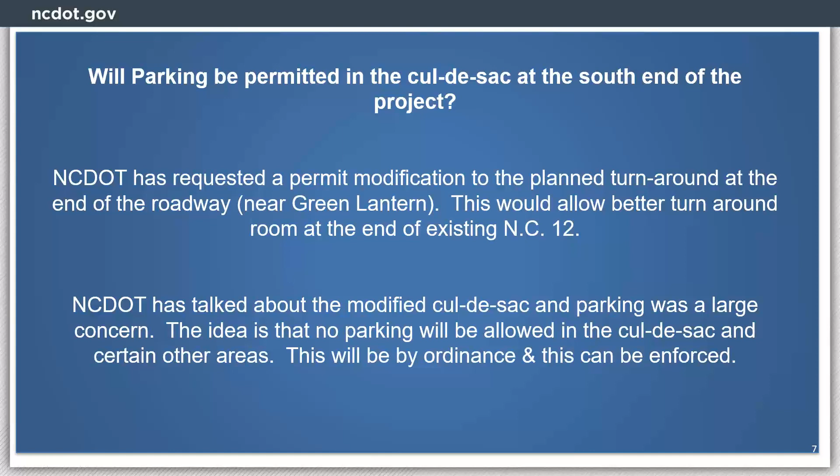Currently NCDOT is not aware of a name having been selected for the bridge. That is a question that has come up quite often, and I've been monitoring the bridge naming committee's agendas, and I have not seen it show up yet.

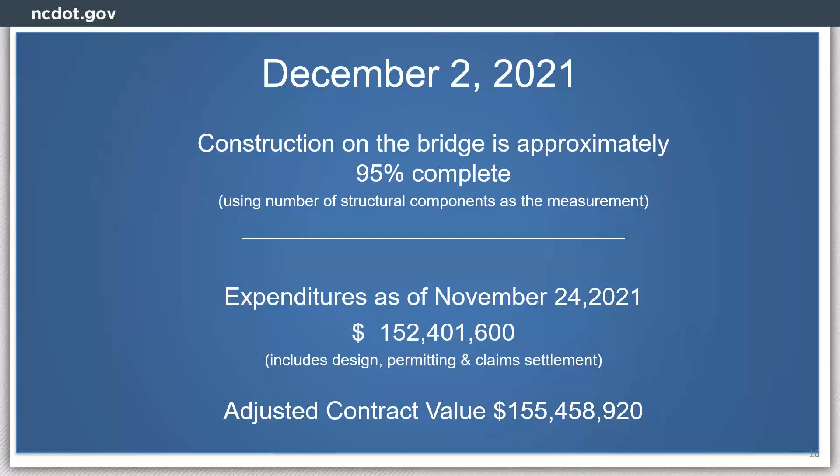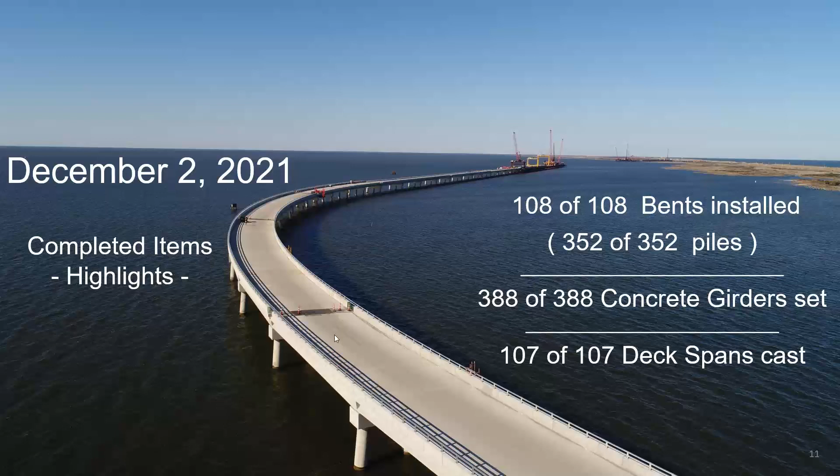As I do with the normal introduction slides to gauge our progress, this is a slide we always think we're never going to get there, but we're there as far as some of the major components of the structure. All of the piling have been installed, all of the girders have been set, and all of the deck spans have been cast. The deck is the roadway surface that you would actually drive on. So those are the highlights of the completed items.

If we go to the next slide, just a quick rundown of the other items that require some significant effort to complete, but nowhere near the same level as driving the piling, casting the decks, and those type of things. So the remaining items: we've got 13 of 25 steel expansion joints that have been installed. We've got just under 19,000 linear feet of concrete barrier wall, also called parapets or concrete railings that are on the side of the bridge. We have about 7,000 feet more to go.

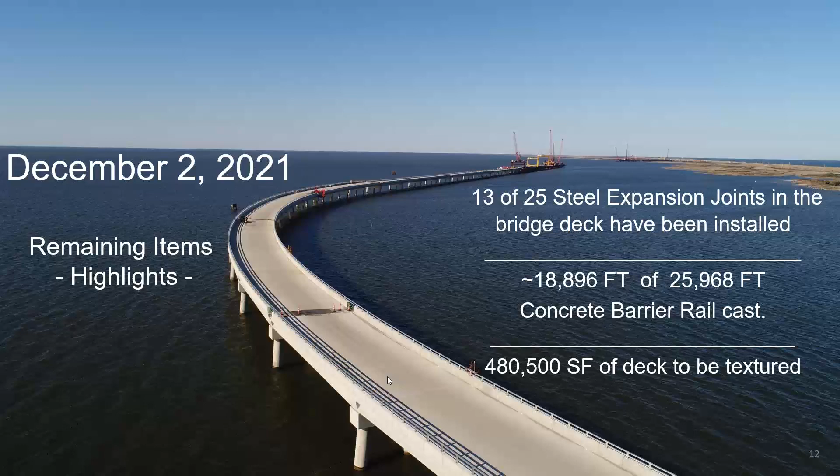And then a new item I wanted to share with the group is the texturing that we do to the actual driving surface. We've got 480,000 square feet to be textured. What that involves is using diamond blades to cut grooves transversely into the bridge deck. So again, those are just the highlights of our remaining items for the actual structure.

Just getting into a little bit of detail of what we're doing. Right now, a lot of work is taking place removing the work trestles, cranes, and platforms for our temporary work bridge. Part of this process will include erecting a crane on the bridge deck to dismantle the last crane. The only other way to dismantle that last crane would have been to reinstall all the trestle components and walk that entire assembly to either the north shoreline or the south shoreline, and then use a different crane to remove that. So instead, contractors elected to erect a crane on the bridge deck where it's been an engineered procedure so that we can remove the last of the components for the work trestle.

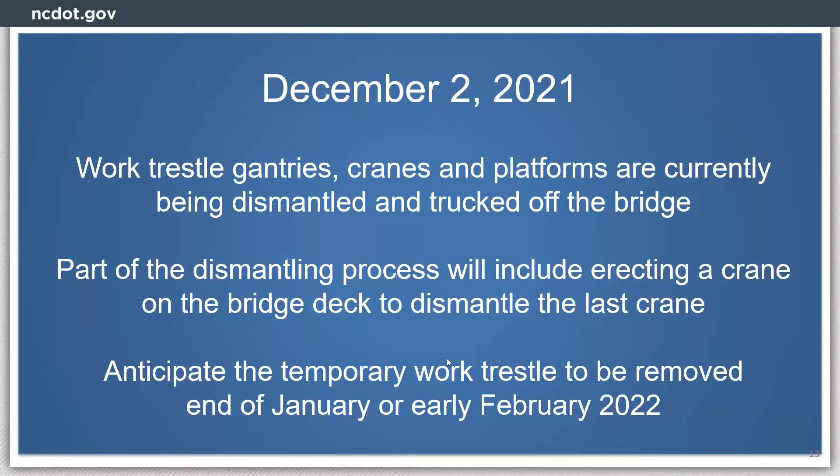We're hoping that all of these components for the work trestle, as well as the accessory equipment, will be removed by the end of January or early February of 2022. Next slide.

As I showed earlier of some of the remaining items, casting of our concrete barrier rails is to begin this coming Monday, December 6th, with the goal to be completed by Christmas for the holidays. So what that means is approximately 26 spans on each side of the bridge that will be casting that barrier rail. Once we get that barrier rail cast, that will also allow us to then install the aluminum, what we call 2-bar metal railing, that creates a bicycle-safe environment that will be mounted on top of that concrete barrier rail.

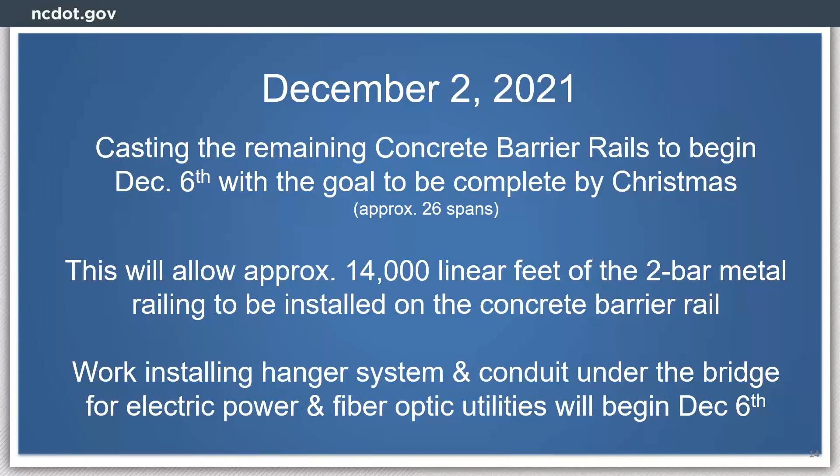While that work is taking place with installing the concrete, casting the barrier rails, installing the 2-bar metal rail, we will also be, contractor working with Cape Hatteras Electric Cooperative, beginning installing a hanger system, conduit system under the bridge for the electric power and fiber optic utilities.

Next slide. Back to one of the other remaining items that I highlighted earlier, the texturing of the bridge deck. Right now we anticipate that to begin in early January 2022. Again, as I mentioned, it was over 480,000 square feet, or another unit of measure would be 11 acres of bridge deck to texture. So there's a lot of surface area out there that we need to work on to create that safe driving surface.

And because of the various activities that are going to be taking place for the demobilization of the work trestle, conduit hanger system, some other deck work with the expansion joints, we anticipate this texturing to be performed at night.

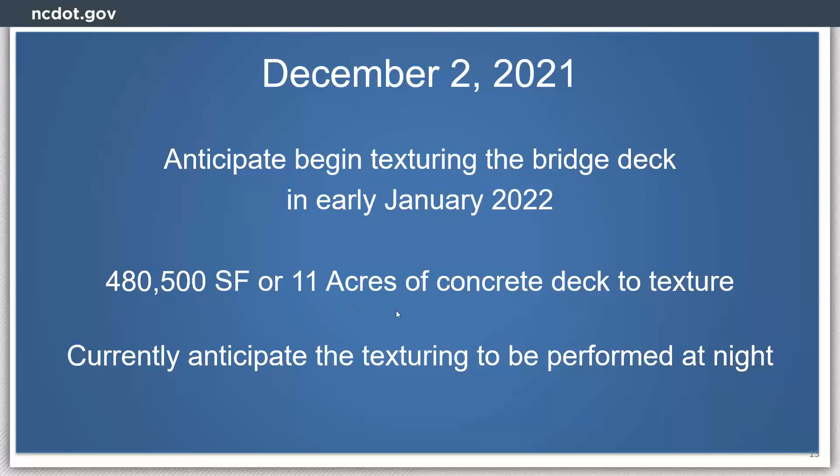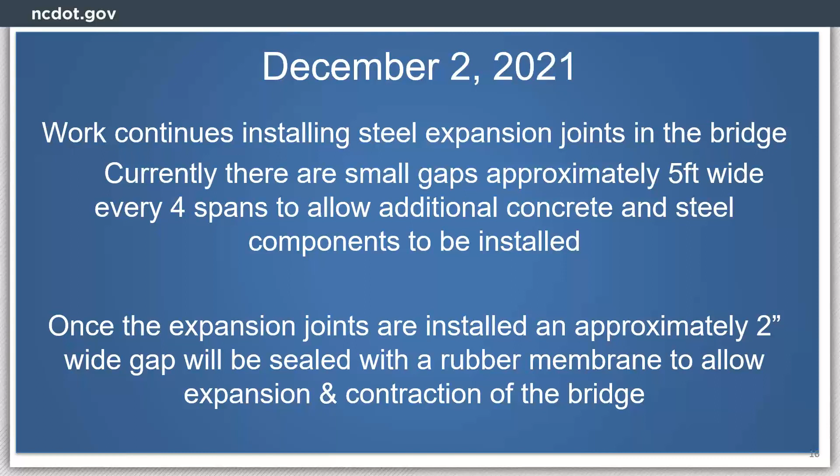Once the steel components and the concrete are installed, this will essentially give us about a 2-inch wide gap that will allow for the expansion and contraction of the bridge through the various temperature ranges. That gap will be sealed with a rubber membrane to prevent debris and, most importantly, drainage from draining down on some of our structural components below.

I'm sure everybody saw or heard about the various roadway work that took place at the south end of the project. That work resumed in October, and again it was a significant number of activities. The highlight was the paving activities on the remnant portion of NC-12, as well as shifting southbound traffic into the completed portion of the roundabout on November 19th.

One of the questions I've received from the community, as well as from some of my counterparts across the state, is why this traffic shift. What this does is allow us to complete the roundabout on the east side of that entire roundabout feature.

In an ideal situation, we would have built the roundabout outside of the existing traffic patterns, say with an on-site detour. But due to the adjacent wetlands, overhead power transmission lines, and our limited right-of-way, traffic could not be shifted into an on-site detour. So we have to use part of the roundabout right now for traffic so that we can complete that eastern portion and make a full circle in the roundabout.

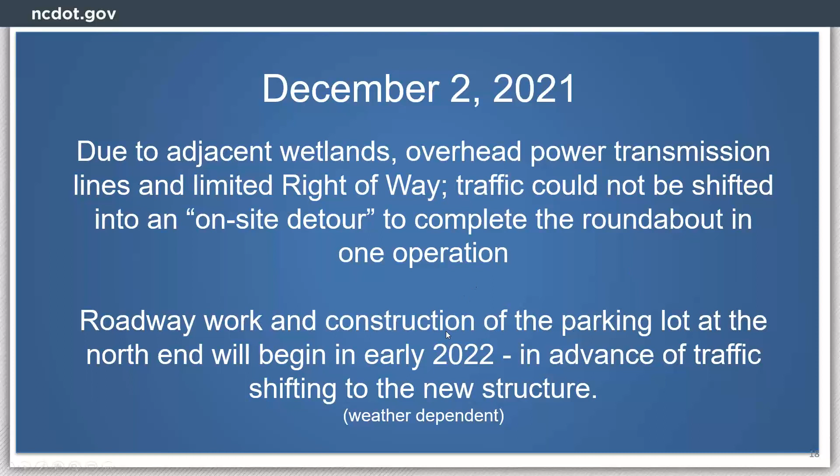That work should resume any day now by our subcontractor. Once the roundabout work is complete, I anticipate activities moving to the north end of the project for more roadway work and construction of the parking lot, all in advance of shifting traffic to the new structure. Again, you'll see this several times in the presentation - everything is always weather dependent, as everyone knows out here.

Speaking of the traffic shift, right now bridge completion is targeted for early 2022, so traffic could be shifted in the February or March timeframe. Again, very weather dependent. Work to remove the existing NC-12 pavement and sandbags on Pea Island, near the southern boundary of the Wildlife Refuge, or the S-curves, will begin after traffic is shifted to the new bridge - also weather dependent.

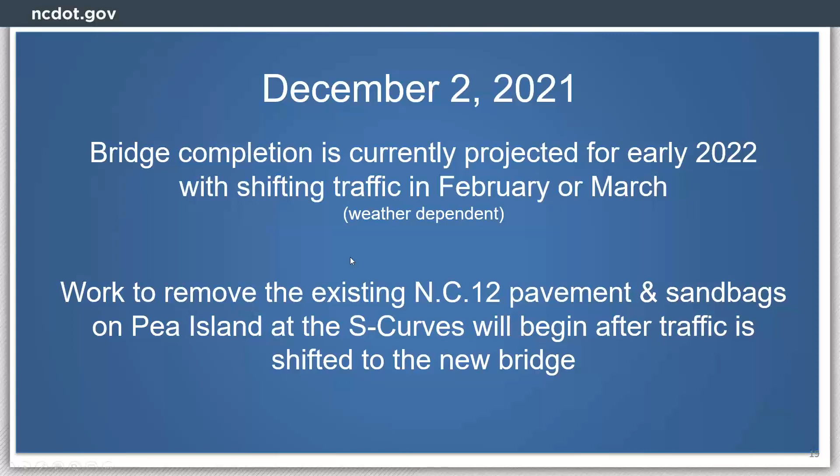We submitted a permit request to the Division of Coastal Management to develop what we call a modified cul-de-sac, as well as install sandbags at that dead end of the road. That permit modification by Coastal Management was not accepted - it was denied. We had a good inclination it would be denied because of the proximity of that additional asphalt and sandbags to the ocean hazard zone.

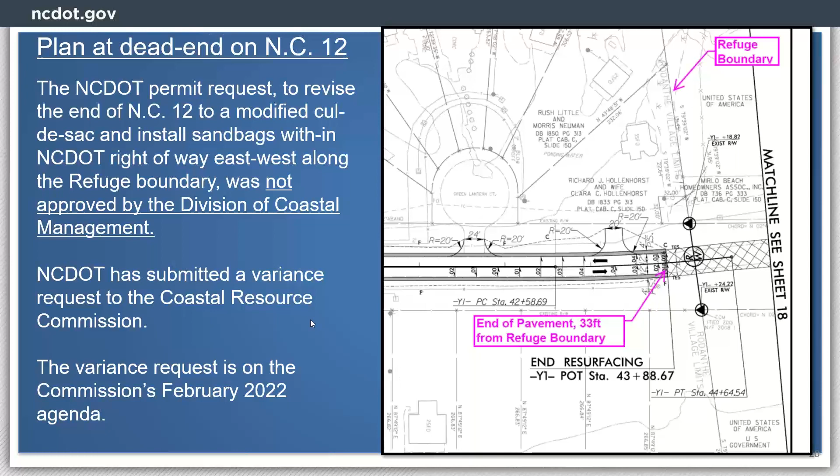Due to the proximity to the first stable line of vegetation, we were already prepared to make a request to the Coastal Resource Commission for a variance so we could receive a permit to conduct that work. Right now it appears we are on the Commission's February 2022 calendar for hearing our variance request.

This is essentially what our variance request would look like if we were able to build it - the modified cul-de-sac is the red cross-hatched area. Instead of a bulb-shaped cul-de-sac, we would widen the road with a sliver widening to the west side of remnant NC-12, providing a curvature at the end so it's easier for vehicles to turn around.

To protect the north end of the modified cul-de-sac, we would be installing sandbags and a dune running east-west within NCDOT's right-of-way, just south of the refuge boundary - that's the area outlined in green. Also, for reference, since this is a question we've received from the community as well.

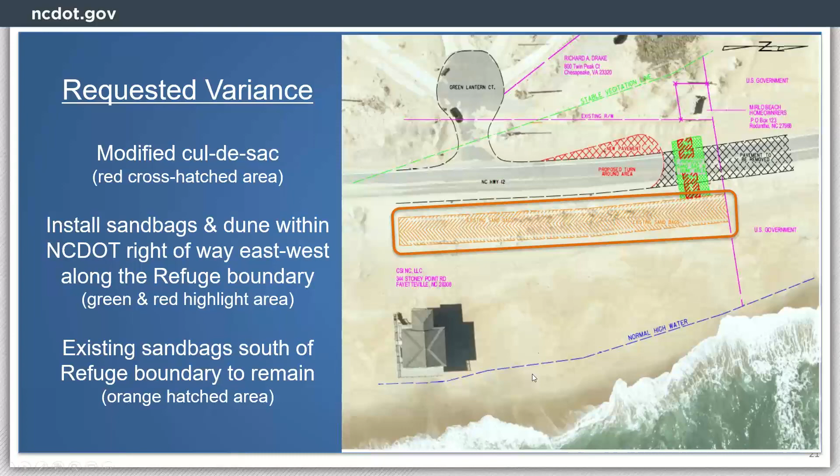We will be leaving some sandbags in place, and those are the sandbags that are within NCDOT right-of-way south of the refuge boundary, which are the approximate limits that Diane has just outlined in orange.

We're hopeful that we will obtain that variance to be able to construct the modified cul-de-sac and install those sandbags at the February agenda from the Coastal Resource Commission, so we can begin that work after we've shifted traffic onto the structure and are doing the pavement removal and sandbag removal on the Pea Island Wildlife Refuge.